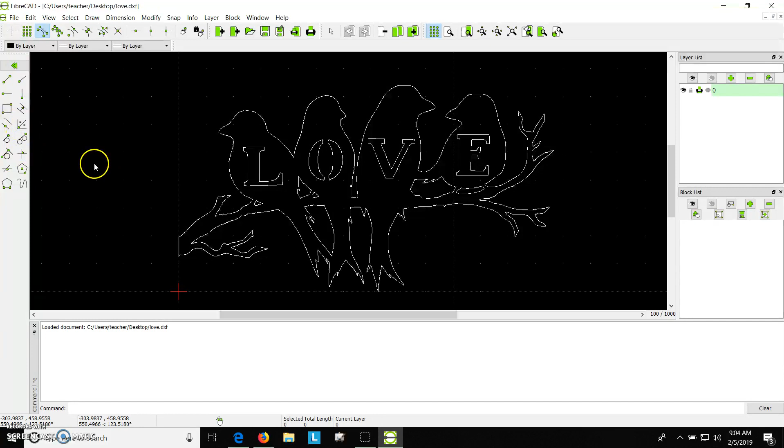Let's take a look and see how big this actually is, because we can zoom in and out, but that really doesn't help us. So we are going to grab the ruler tool. If you can't see the ruler tool, keep hammering the escape button until it goes to the main menu. This resets everything, and there's your ruler tool.

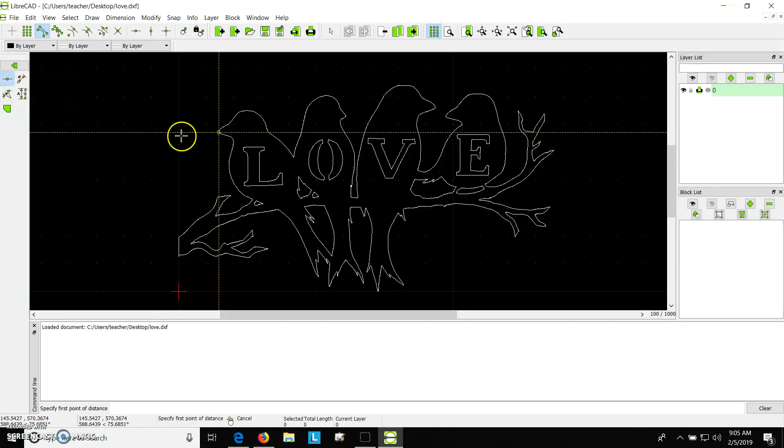Once you get into any particular tool in this program, it gives you tool options. Right now I don't have a ruler tool until I select one of these actual options. I'm going to choose distance point to point. So click that, and I need to choose 2 points that I'm going to use as my measurements here.

Let's say this corner here, and right now it is snapping onto there. When you first start LibreCAD for the very first time, you won't have the ability to track the actual points like that. If you look up here, there are different snaps: snap on endpoint, snap on any part of the entity, snap middle, center, intersections.

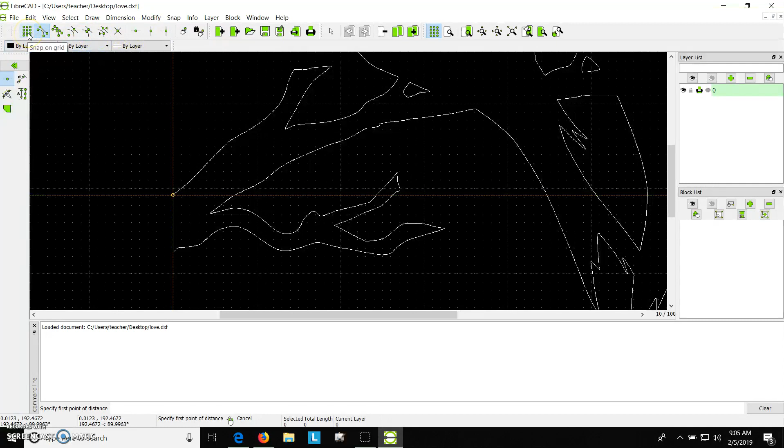So you can choose to snap on the grid, so that's any of these grid dots. Basically, let's just use snap on the endpoints. I'm going to choose this extreme tip, and then I'm going to choose that extreme tip right there, and it's going to report.

Let's just scroll in here, that it is 1,427.9123 inches. That is massive, it's bigger than the room that we are trying to plasma cut in. That's just because it converted pixels into inches, and that's just what happens.

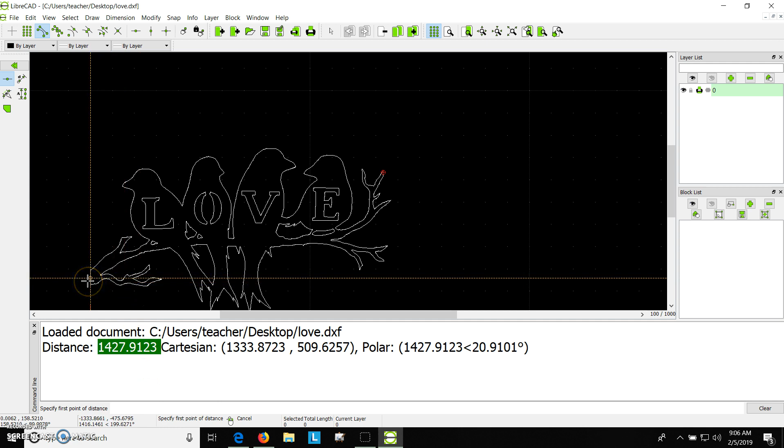So what we need to do is scale this down to a realistic size for our project. I'm going to say that if I grabbed a tape measure and I was to measure that distance and decide how big I want it in real life, I might choose to make that 12 inches long. Let's just make it 1 foot long.

So we need to convert this into 12 inches, and there's going to be a small bit of math required. So here's what we will do. I'm going to bring up a calculator.

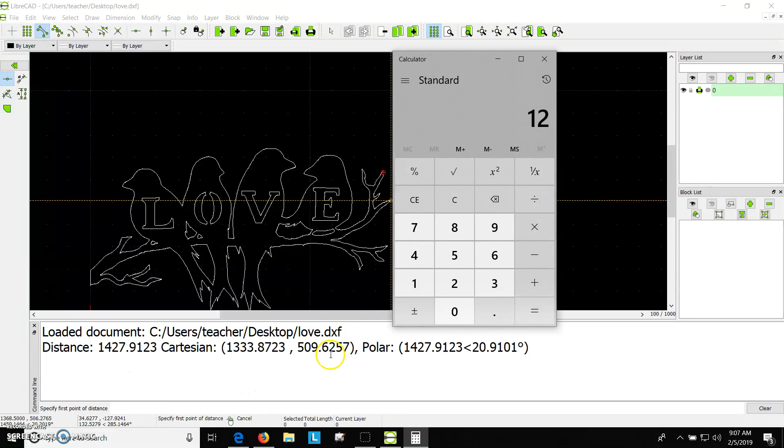On the calculator we have two numbers: 1,427.9123 inches, and the 12 inches that we want to achieve in real life. So you're either going to divide the 12 by the 1427.9123, or you're going to divide the 1427.9123 by 12.

I'm going to tell you right now that the number that goes on top, the number that gets divided, is the small number if you're scaling down. So if you're scaling down, let's put the 12 inches that we want this project to be and divide it by the 1,427, and let's put in the decimals, 0.9123, because it'll be more accurate.

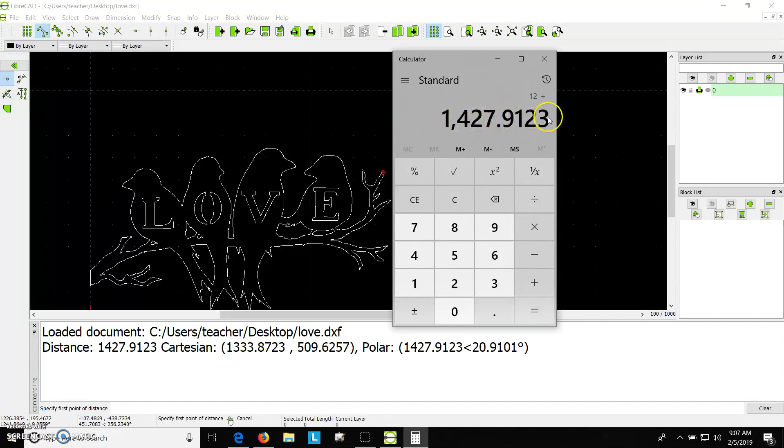So we're taking the small number that we want, 12 inches, our real life model, divided by what it actually is, and we get 0.00840. I'm not going to call these all out, but let's just say when you go to do the sizing, please remember to include a bunch of these decimal places. Don't just put 0.008, it's not accurate enough.

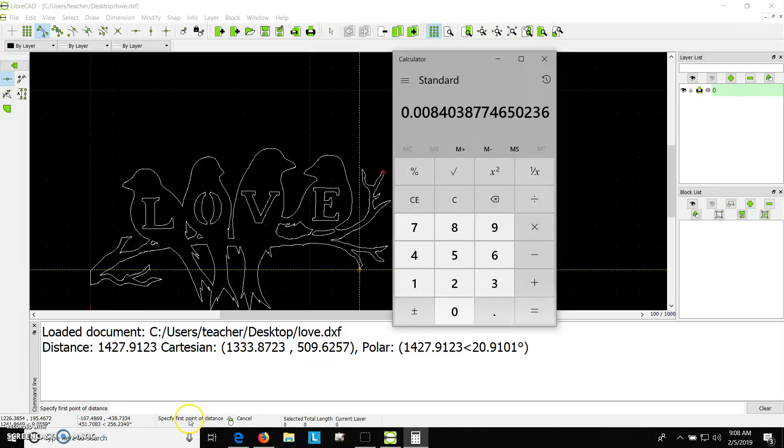So we will put 0.0084038. Let's just do that, and let's go and scale here. I'm going to just write this number down on the side for myself.

0.0084039. Let's round that to 9. Good, keep that aside, close this up.

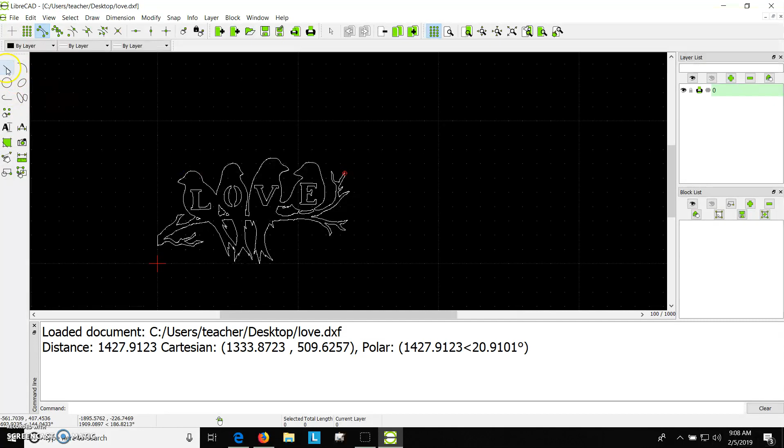Let's do a scale operation. Let's hit escape a bunch of times here and get out of this menu. Now we're back to the default home menu. Let us select the entire thing by clicking and right dragging, and all of that geometry is now selected.

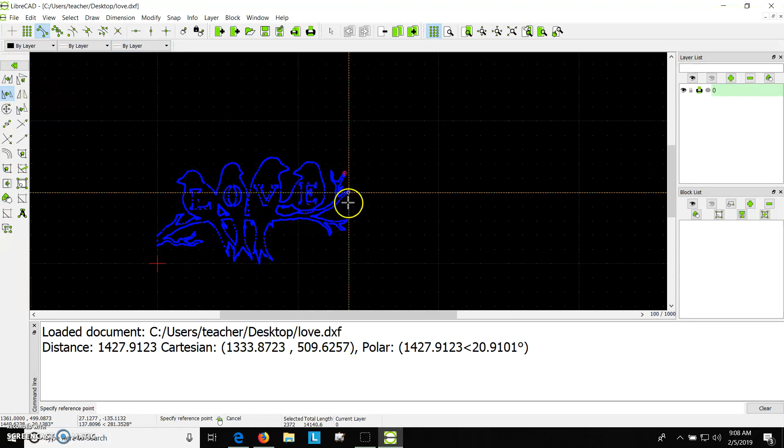Let's go to the modify menu, and let's go to scale. Nothing happens, it's got a cursor coming up. If I take a look down here on the screen, it says specify reference point.

The reference point is just a point at which you're going to scale down to. I can just choose a corner or a middle. In this case, I'm just going to choose this bottommost corner. That's my reference point, and it's going to scale down to that point.

Now this menu comes up, and the first one is how many copies do you want? If you just want to shrink it, then you would delete the original large one, or you could shrink it and keep the original. It just depends on what you're trying to do. I'm going to shrink it down and get rid of the original, and I only want one copy, so I don't need to select this. So delete the original file and only end up with the small version.

Now, isotropic scaling - if you see what happens when I click this, it causes this Y box to disappear. With that off, you have to specify the height and the length and the width of your image, which causes some stretching, or it causes even a lot more math to be done. If you click on isotropic scaling, it eliminates the length. All you have to do is scale down one of these, and it will do the math to scale down the other. So you scale the length, and it will automatically scale the width, and it'll keep the same proportions for you.

These boxes here often are unchecked. I would check them, and we won't talk about those, but that just essentially says keep all of the settings of the original the same.

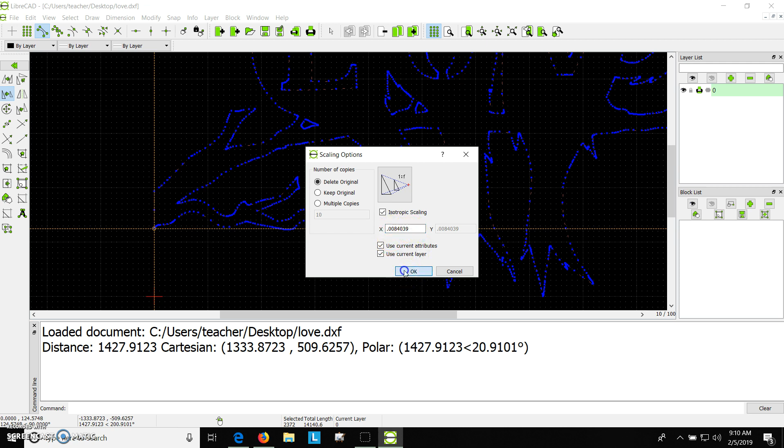Now I'm going to put my number in here. That is the number we calculated, 0.0084039. That is our scale factor. So it's going to multiply the entire dimensions of that previous image by this much, which is going to shrink it quite a bit. Let's hit OK. And there it is right there. It shrunk it down to our reference point.

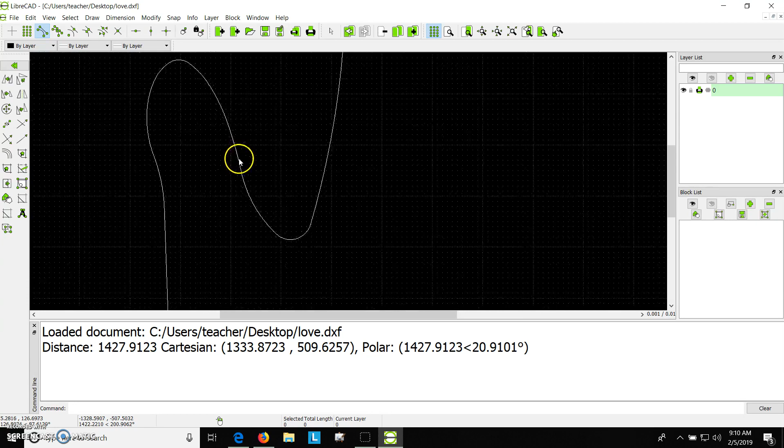If I was to scroll with the mouse wheel and go in, what we'll find is an image that looks exactly the same. It hasn't pixelated or anything like that. If we scroll into it, there's no change at all. There's no pixelation because this is all based on mathematical lines, not on little pixels.

So we scaled it, let's do a check to see if we were effective. I'm going to hit escape a bunch of times, comes back to our main menu. Choose the ruler tool, I'm going to choose my distance point to point. Make sure my snap for endpoints is on, and it snaps to that little point. Click there, and click there, and it reports a size of 12.0074 inches, which is close enough.

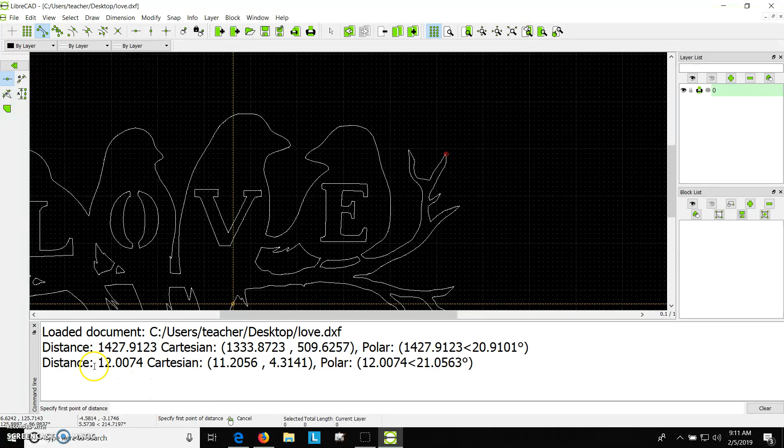Okay, so there we have it. We have scaled down something that was like 1,400 inches down to 12 inches. We are ready for this to be taken into the back room and prepared for cutting.

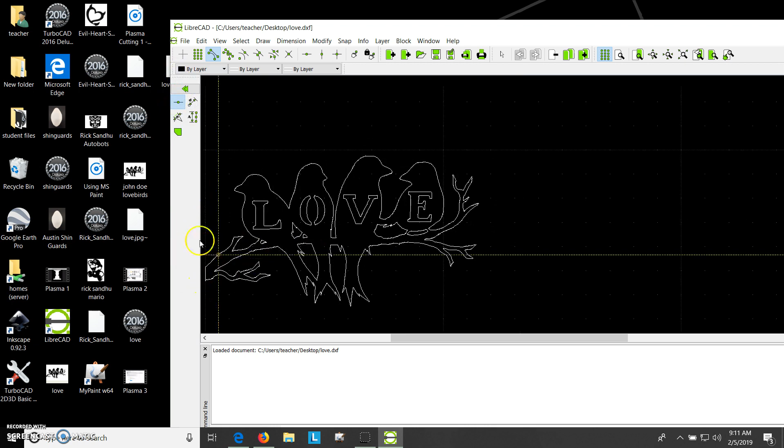Make sure before you leave, you go File and you save. That just saved my image over top of my old DXF. So when I leave here now, and I take a look at this particular DXF, if I was to open that up again, it will be saved right over top, and this will be our 12 inches tip to tip, and there it is, 12 inches, we're good.

Final steps are showing you how to get this onto a USB stick and where to go from there. That's it.